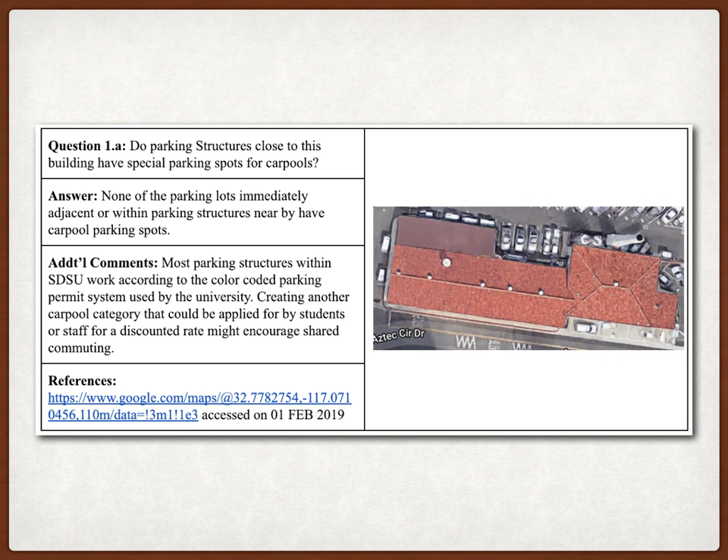Question 1A, we looked at the parking immediately around the building and there were no carpooling spots. This is probably because of SDSU's parking policy where they sell permits. However, there could be some quick changes made for sustainability where we add that at a discounted rate, or cooperate as a university with the carpool companies, the van shares and ride shares. But there were no carpool spots within the immediate vicinity.

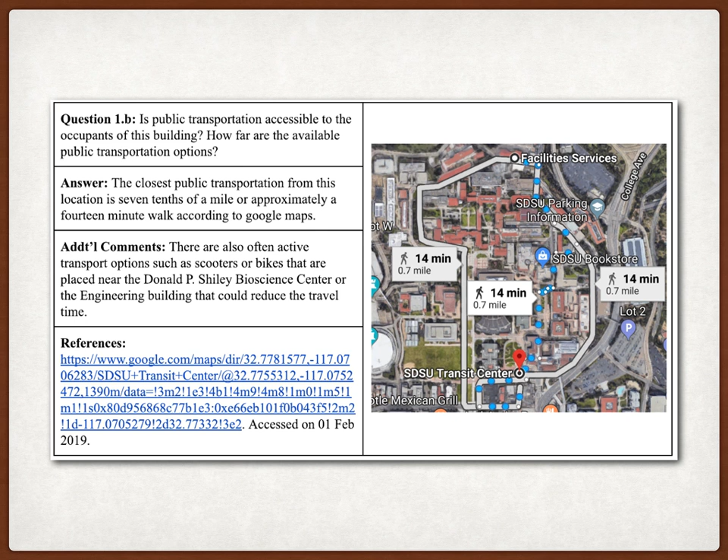For question 1B, public transportation is about 14 minutes away, as shown here on the Google Maps, about a little less than a mile walk to the SDSU Transit Center. Not shown on the map is Lyft and Uber pickup spots right across from the GMCS building, which is a shorter walk.

Question 1C, there were no bike racks at this particular facility. However, there were bike racks near the EIS building, the bioscience building, and the art building, which is a short walk away.

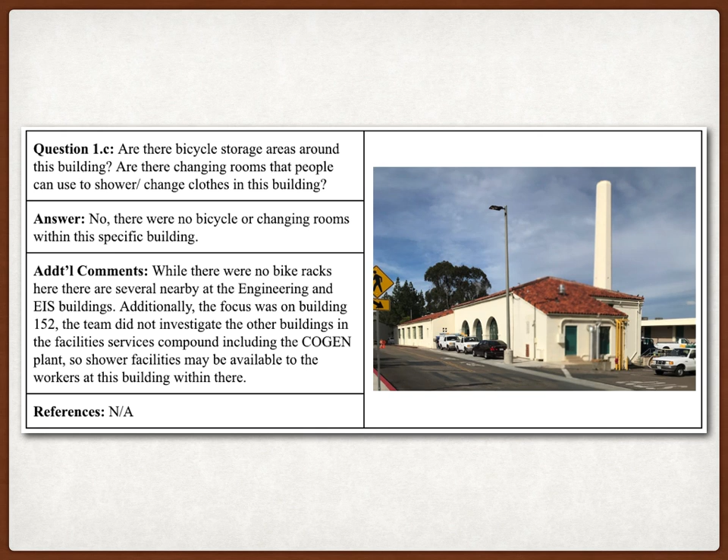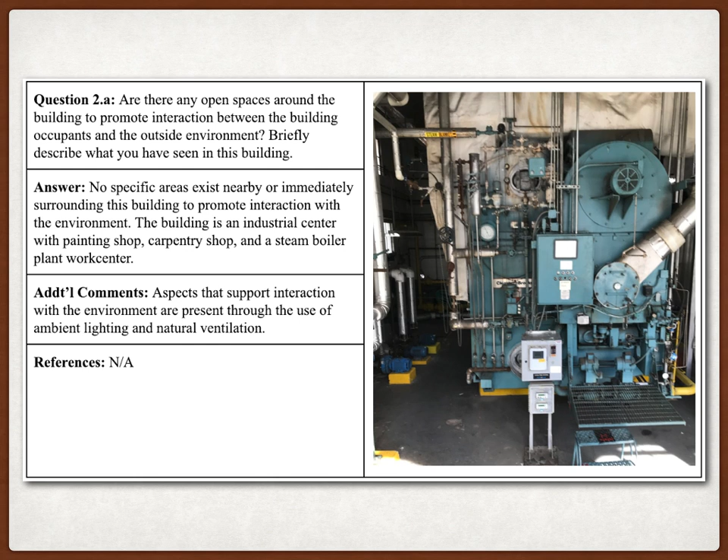For question 2A, there weren't particularly open spaces around this building for interaction with the environment. There was some landscaping, which we'll get into in the next question. But as you can see with the picture, it was an industrial shop-oriented building, so there was not a whole lot of interaction there. Additionally, as we'll get to later in the presentation, it's a pretty dated building, so the integration of nature was not really considered at this time.

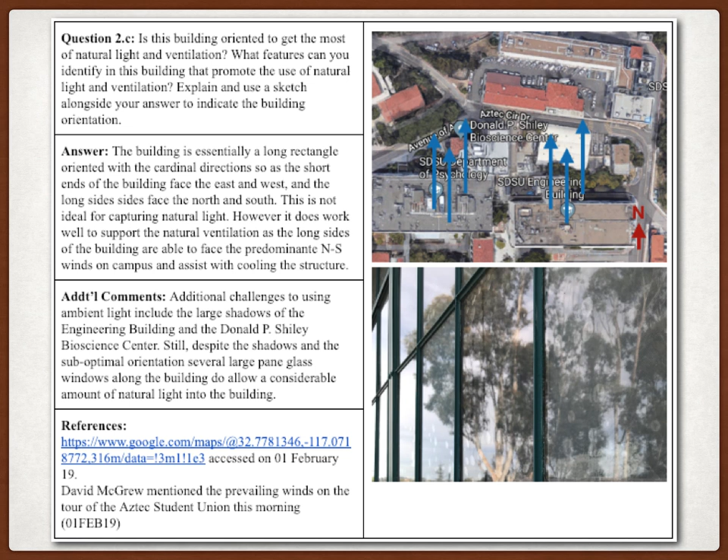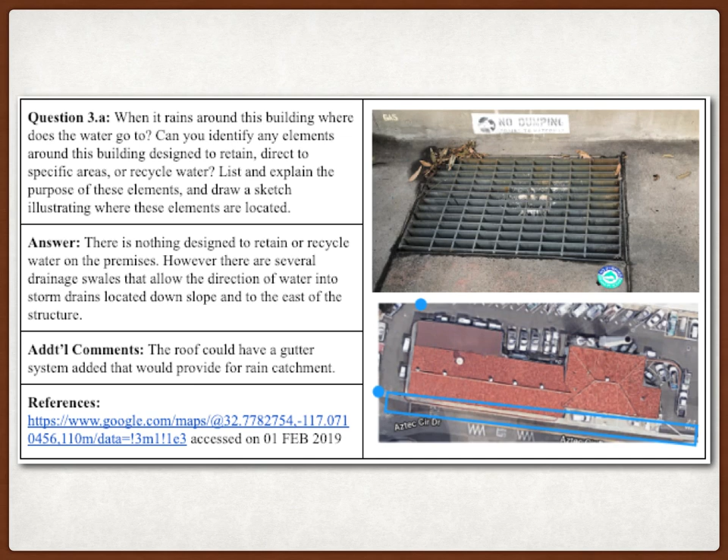Next up will be Isabel.

So as for question 4A, no, we didn't find any elements of water saving or recycling inside this building. I believe particularly this building doesn't have any showers or bathrooms, water fountains, as compared to other buildings. It is mostly very basic.

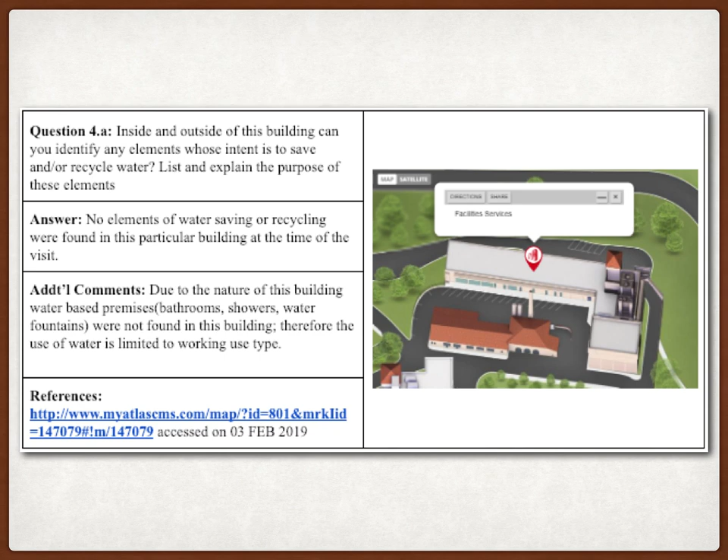As for question 5A, yes, it used a lot of LED lighting bulbs and natural lighting as well. Inside the shops, we observed that there was a lot of windows which allowed natural light to come in. I believe this was because it was an old building from the 1940s. Back then, natural lighting was widely used as well.

Question 5B. Alright, so this building surprisingly did have its own boiler and cogeneration plant, which generates energy to different buildings on campus, as we know. It was really surprising that we could walk around and we found Tom Abram, who also worked for San Diego State University's Sustainable Branch. He explained to us the way the steam boilers used to work with natural gas to trigger steam turbines and generate electricity throughout the campus.

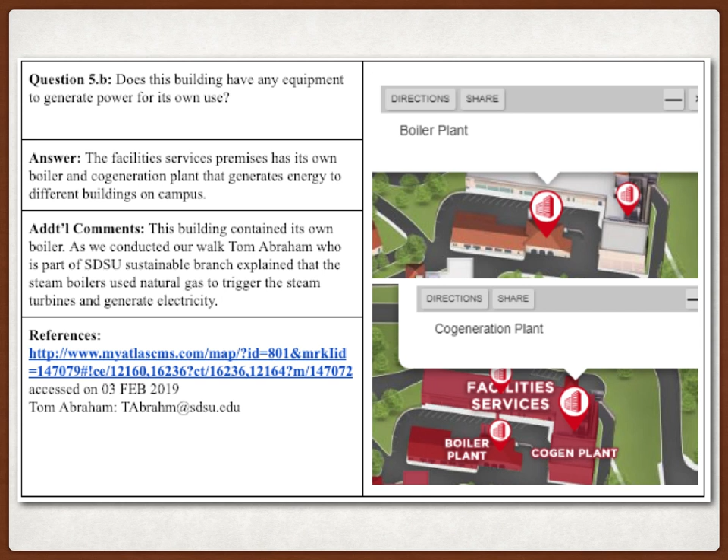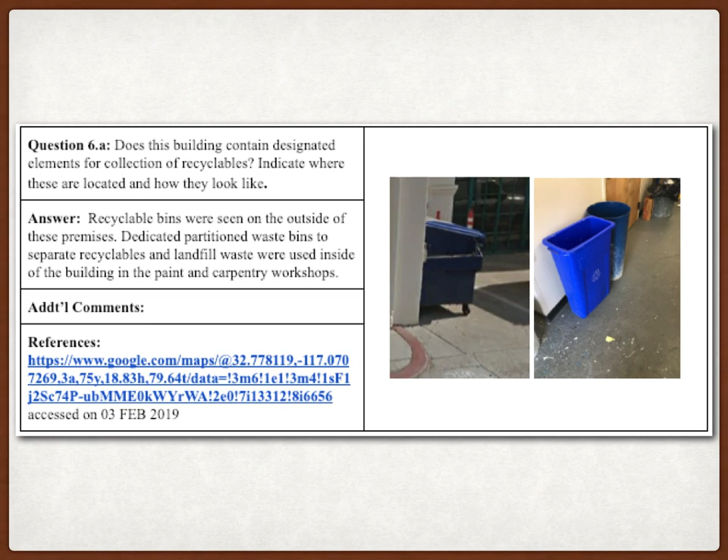Question 6A. Yes, we did see a lot of recyclable bins outside this premises as well as inside, as we could see in the pictures. They were located in the paint and carpentry workshops.

Now to Thomas. For question 7A, this building utilizes both mechanical and natural ventilation systems. For the paint workshop, there was a north-south oriented hallway to allow for the south to north winds to flow through and ventilate. But when the ventilation fans were turned on, the paint disposal area would induce a north to south wind to ventilate the fumes, while the office spaces and break rooms were not affected because the south to north wind would meet the ventilation fan.

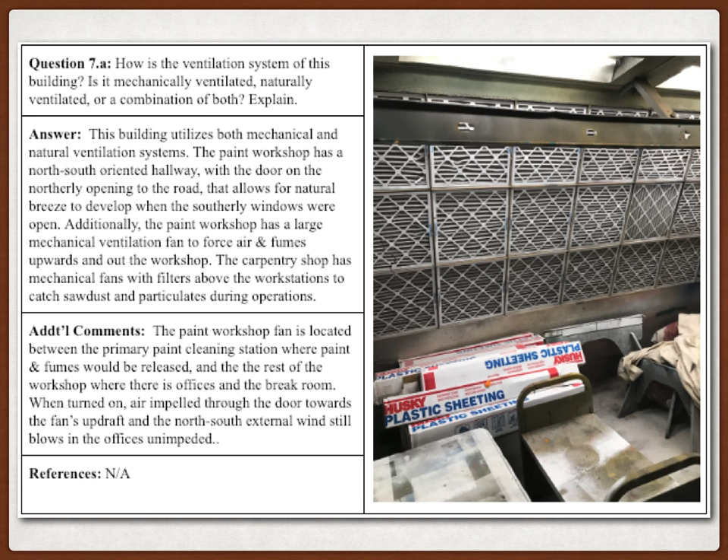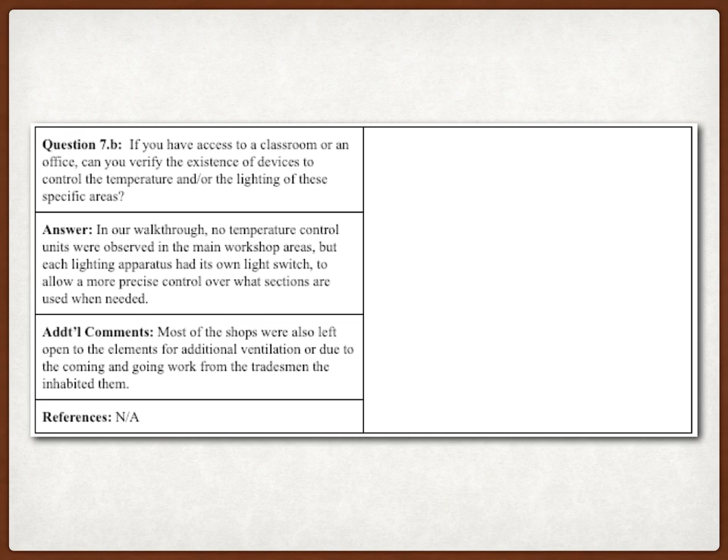For question 7B, in our walkthrough, we didn't see any temperature control units. The lighting apparatuses all had their own light switches to allow for control of which lights were being used when the work crews would need them.

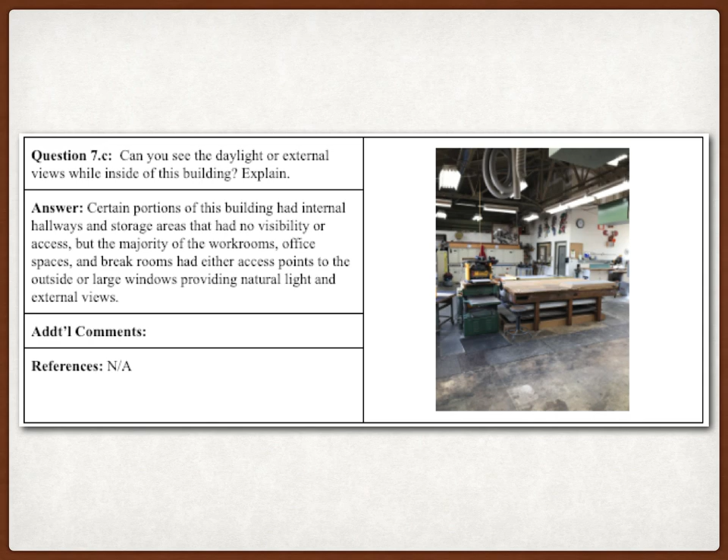For question 7C, certain portions of the building were not open to visibility of the external environment, but the majority of the workrooms, office spaces, and break rooms all had access points or external views.

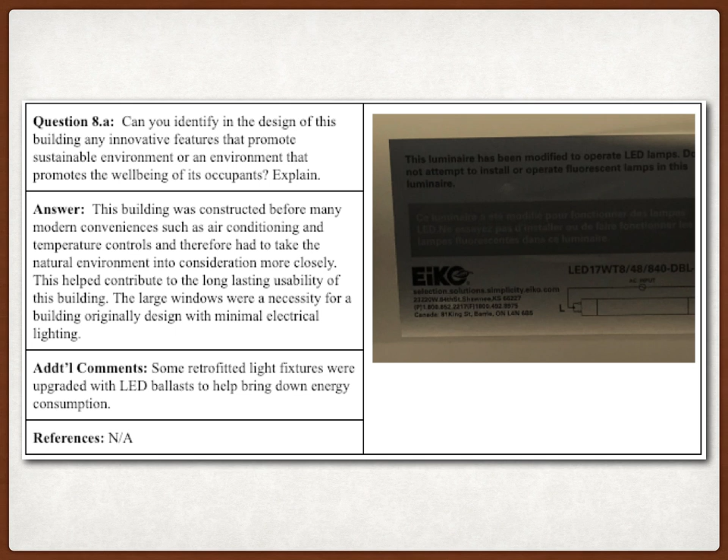For question 8A, this building was constructed before a lot of the modern conveniences and technologies that we currently use for air conditioning and temperature control. This forced the designers to use a lot more natural elements, such as the large windows, to help increase usability as well as increase the aesthetic design. There were a lot of retrofitted light fixtures, which were upgraded to LED ballasts to help bring down energy consumption.

For question 8B, there were a few examples of biomimicry in the building. The most prominent example would be the terracotta tile roofing that is consistent with the southwestern / Spanish colonial stylings. These tiles help reduce heat absorption because of their clay material as well as their red-brown color, as opposed to standard asphalt shingles, which would be black and increase heat consumption. Thank you very much.